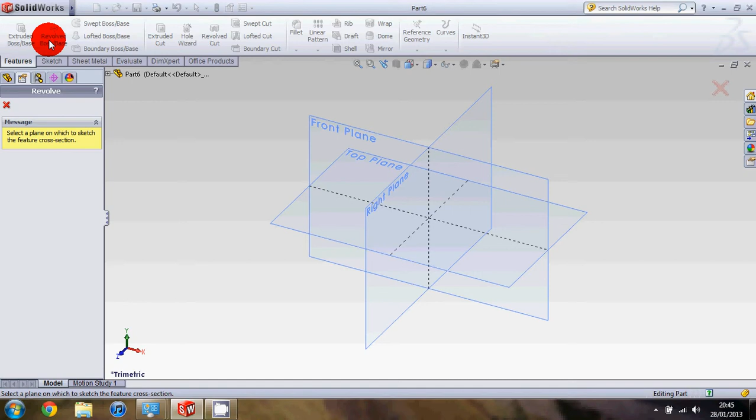I'm just going to open up a new part, and this time rather than use sheet metal or extruded boss base, I'm actually going to go onto revolved boss base, and you'll see what that means in a minute. Now this time, rather than using the top plane, I'm going to actually start on the front plane, and I'm going to draw quite a complex shape.

Now this will form a section of our swivel head, and I'm going to make the shape out of basic straight lines. So to start with, I'm just going to draw a vertical line, and I'm going to smart dimension it to 1.5 millimeters. Okay, you'll probably find that it shrinks quite a lot, so we might have to zoom into it. I'm just going to move that dimension around, just move it a little bit closer so it's easier to see, and zoom back in.

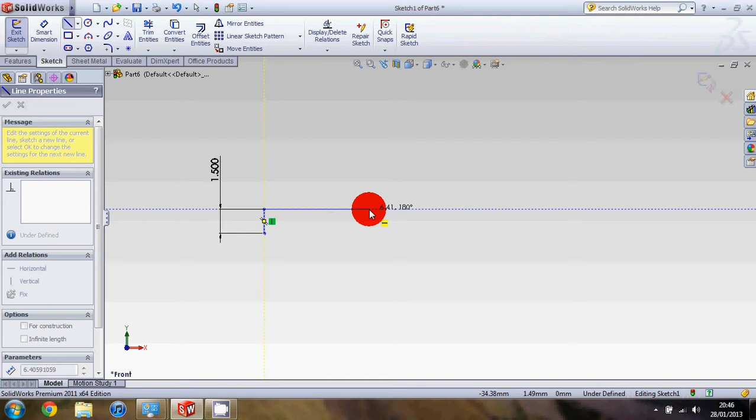Now continuing up, then we're going to have a line going across, and now I'm just free drawing these because I know the basic shape and I'm going to add the dimensions later. Okay, so if you could follow along and make your shape look like the one I'm drawing. So I've got a few lines at an angle there at the top right, then I'm going vertically down, horizontally across, and then I'm actually wanting to join this line to this one horizontally. Okay, so quite an unusual shape, but you'll see why we've done it in a minute.

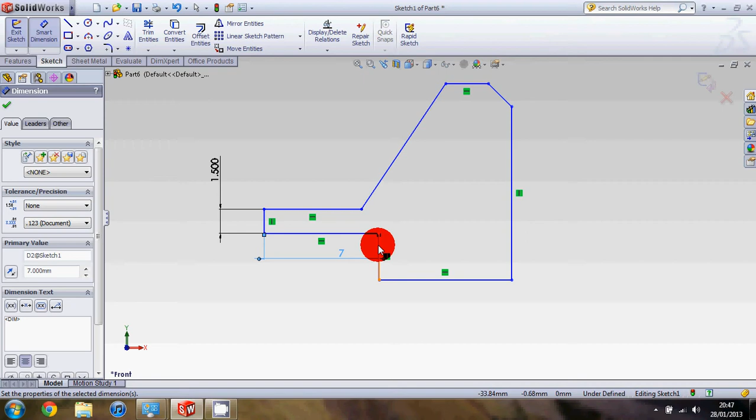It does have to be exact, so I'm going to add a few other measurements here. So this line needs to be 7 millimeters. This line needs to be 2.5. This line needs to be 8. Now the height of this, so from there to this point, needs to be 1.5,

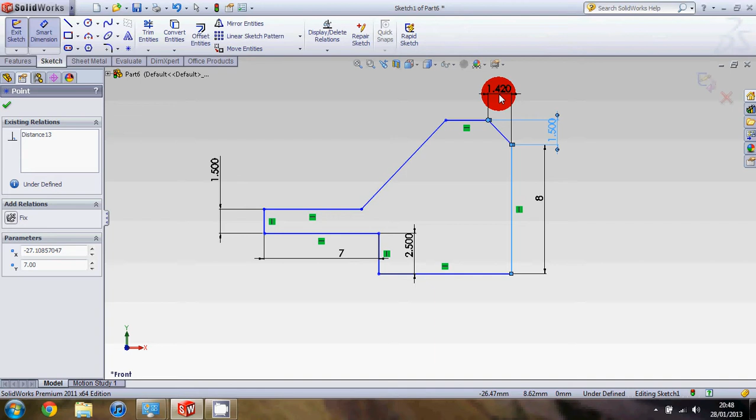and the width of it, that distance there, needs to be 1 millimeter. This flat bit has to be 2 millimeters. And finally the full length has to be 13. Okay, we're almost done now.

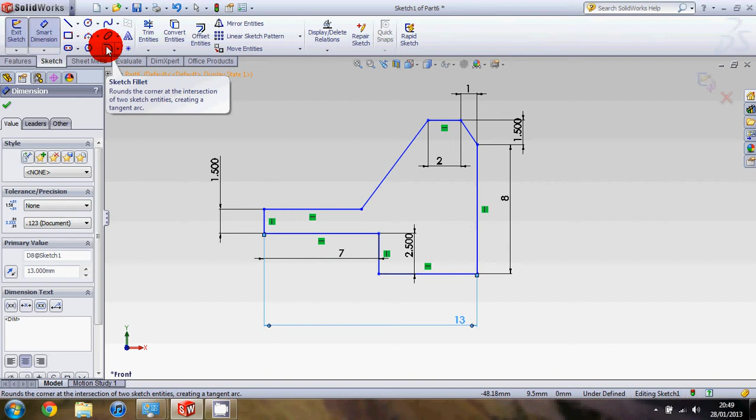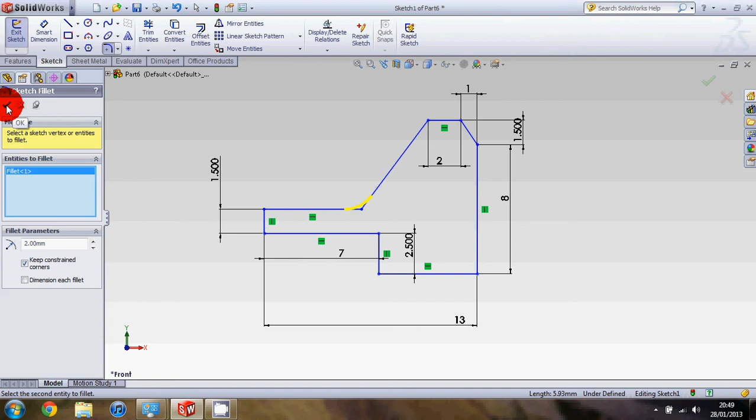All I have to do is add a curve here between this line and this line. So I'm going to do that by adding a sketch fillet, very similar to a fillet we might have drawn before. Before we start drawing it, we're going to tell it that the fillet radius needs to be 2 millimeters. Okay, otherwise it just won't let us draw it because we're working in such a small part. So I'm going to simply click that line and that line, and then we've got a nice round fillet there shown as a yellow preview. Hit OK, and it creates it for you right there.

Last thing I'm going to do is specify the length of this line, and this one's quite specific. It's got to be 3.04 millimeters. Okay, so now we've got this quite unusual looking shape with all the measurements correct. You must make sure that these measurements are as I've done them. Okay, we're going to leave Smart Dimension and we're going to leave the sketch.

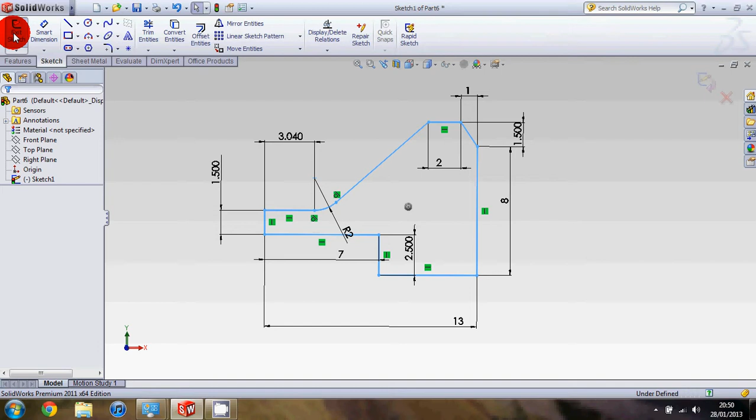Now it's just about to start revolving this. Now what it does when it revolves a part is we've given it a side view, and it's going to spin it round and create a part like that. Best way to show you how it's done is to do it, so it's asking for the axis of revolution. All you need to do is click this bottom line here,

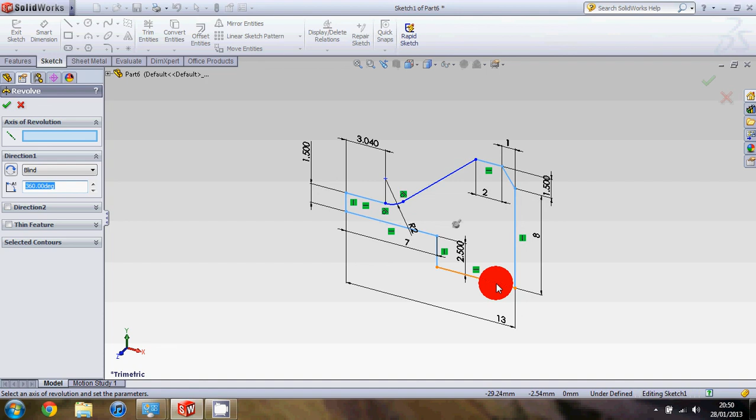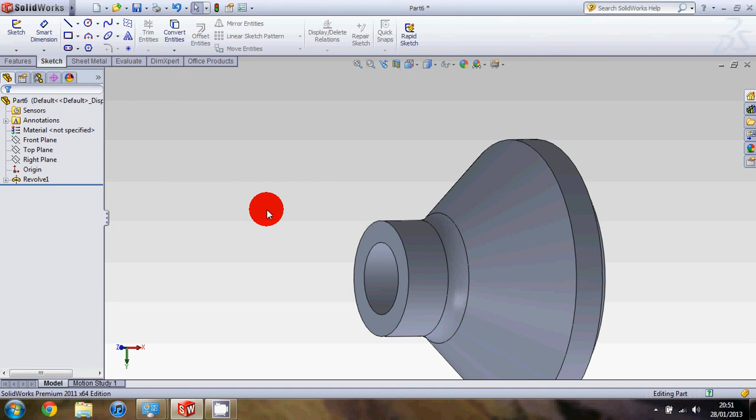and as you can see it's revolved that shape all the way around 360 degrees to give us our part. Once we click OK, it makes it into a full 3D shape, and as you can see it's got that hole drilled in as well. Okay, so that's ready to be rendered and added to the rest of your assembly.